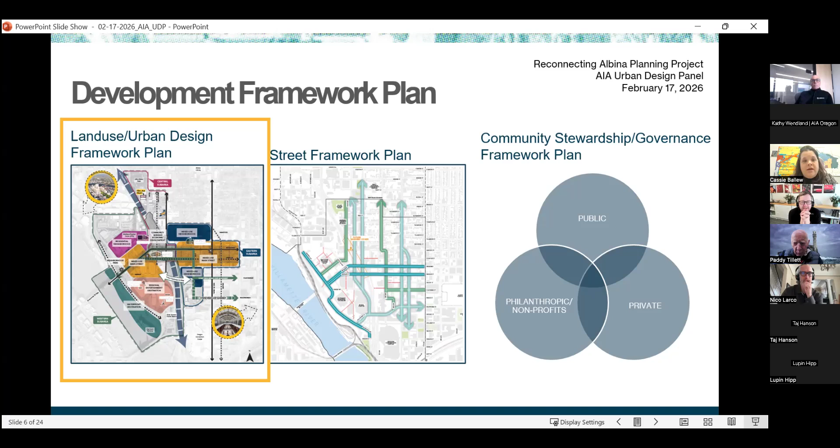So the development for this project is building on, in particular, two past plans and frameworks that happened pretty recently. The first is Central City 2035 Plan Urban Design Framework for the Lloyd District, and then the Albina Vision Trust Community Investment Plan. Both of these laid a pretty solid foundation for how an updated district framework might consider new zones of activity, new neighborhoods.

For instance, the Central City 2035 plan has kind of helped us build off the foundation of thinking about the character of different streets, such as Broadway, Weidler, Interstate, MLK, Grand, and Williams, and we wanted to take that to community and see if those ideas still held.

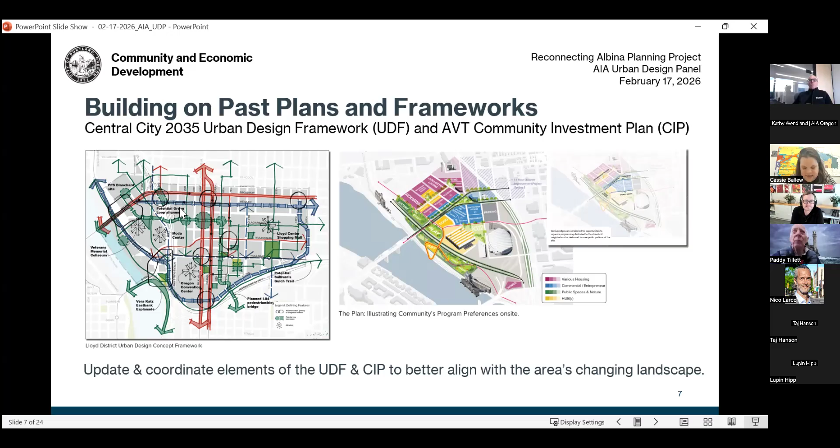With AVT's community investment plan, we have looked at how they laid out different zones of activity, functions and uses in the district, as well as several other concepts for gateways, et cetera, and trying to build off that as well. So although some of the initial details of these plans have shifted over the years, they're really creating that foundation for this. One of the goals is to update the elements of these frameworks to better align with the area's changing landscape.

So our current district framework, this image on the left, which is a little small, I have a larger one at the end to share, is to really leverage the area's strengths by creating a fully functioning and connected district, as well as support its role as a regional destination.

The framework identifies three sub-areas, Western, Central, and Eastern, and within them the shaded areas indicate different functions or zones that were influenced by the CIP, Central Cities 2035, or just our general thinking about how the future of these neighborhoods could grow.

The Western area is basically the area west of I-5. It's our most dynamic and large sub-area, a hub for major entertainment venues, offering future opportunities for waterfront development, and offering an opportunity for a new residential anchor with the redevelopment of the Matthew Prophet site.

And then the central area is really focused on that future highway cover, thinking about the community-serving uses and connectivity that it's slated to serve.

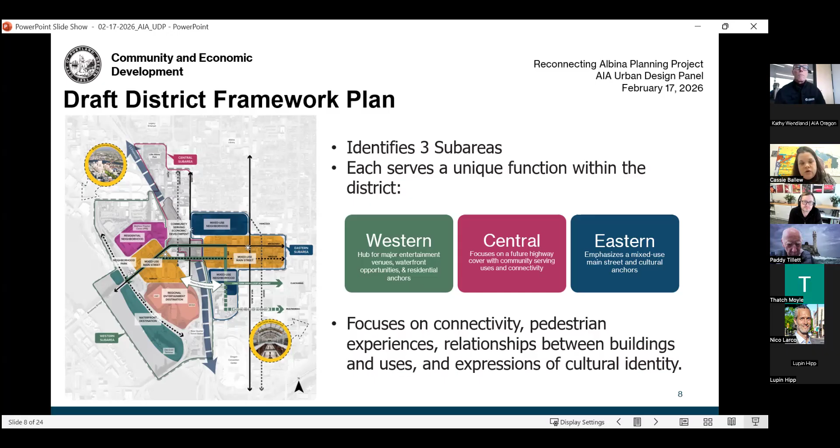The current zoning and entitlements already allow for a wide range of uses and building types. So instead, our team has focused on connectivity, pedestrian experience, relationship between buildings and uses, and expressions of cultural identity within the district, really trying to emphasize these unique sub-areas.

So on another level, the framework we're building, we've stripped away some of the elements to look more closely at street and pedestrian connectivity, thinking about identifying future existing desire lines, for instance, how to have better connections through the Rose Quarter venue sites or through the parking garages.

Also thinking about what areas could act as key gateways or open space opportunities. On the pedestrian connectivity map here, we have this red pedestrian connection line that's really influenced by Albina Vision Trust, one of their concepts for an Albina walk, and thinking about how we could expand on that and emphasize it in our framework plan and any future legislative projects.

So picking up on concepts like that and just seeing how we can use these to revitalize and strengthen the district's neighborhood and connectivity.

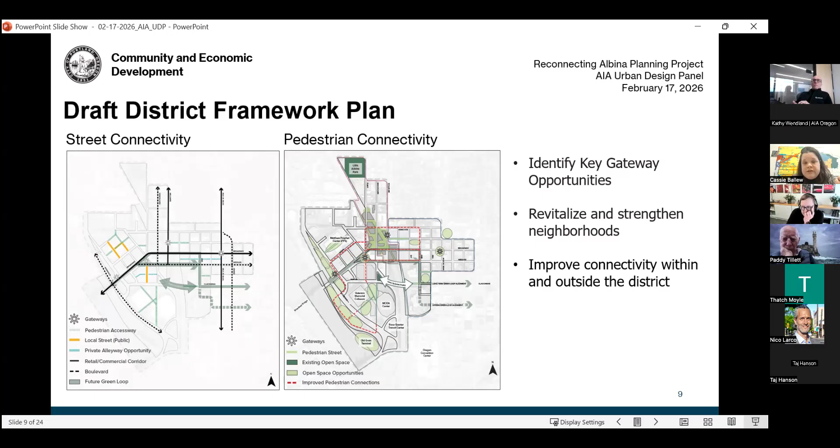So next, I want to take you through each of the sub-areas a little bit. They each, as I said, have their unique functions and character. For the eastern sub-area, we really wanted to emphasize a mixed-use Main Street on Broadway, as opposed to thinking about what the Central City 2035 plan laid out as its main function as a commercial corridor.

Whereas Weidler, we're really looking at making an improved public realm experience on Weidler and seeing that more as a boulevard, as you're kind of just passing through that, and thinking about how those two streets interact and what their character is, and seeing what community thinks their future character should be.

The images are also looking at pushing for restored opportunities for mixed-use neighborhoods, flanking that Broadway Main Street, to again uplift and strengthen the existing cultural cornerstones in the area. So really trying to make this a neighborhood with a central Main Street couplet, and also looking to make safer, more well-defined opportunities for pedestrians and cyclists.

And the notes here are our work with PBOT to try and knit some of those pieces together to make sure we're thinking about not just future activation of the corridors, but how we're connecting to the rest of the district. The photos on the right were intended to show community different ways that these corridors could be activated, showing some ideas for traditional storefront, what some of that could look like, and seeing how that resonated.

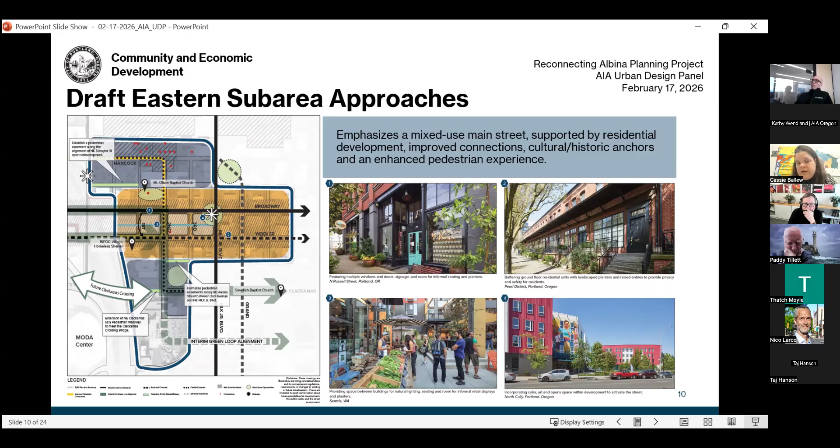For Central, it's a bit more straightforward. It's really focused on the Rose Quarter I-5 highway cover, and improved connectivity.

The image you see here on the left is based off work that AVT did with Holst and the HAB, the Historical Albina Advisory Board, back in 2024. They worked on concepts thinking about what kind of community uses, public space, and connectivity could be on the cover, thinking about the southern portion as the civic community public-board space, and as you move further north, it's more private, more community and neighborhood serving.

And so we really wanted to re-approach this with community in December, see what they still thought about it, give some more visuals, reflecting what was heard from the HAB those two years ago.

So again, showing some images of open space, active public space, amphitheater, reflecting back on the Historic Cultural Center, showing examples of that or the Black Historic Culture Center that's been proposed, and also thinking about a future market space, how we could throw in elements of Afrofuturism, trying to weave that into the narrative of this place, because a strong expression of cultural identity was really a theme in this part of the district.

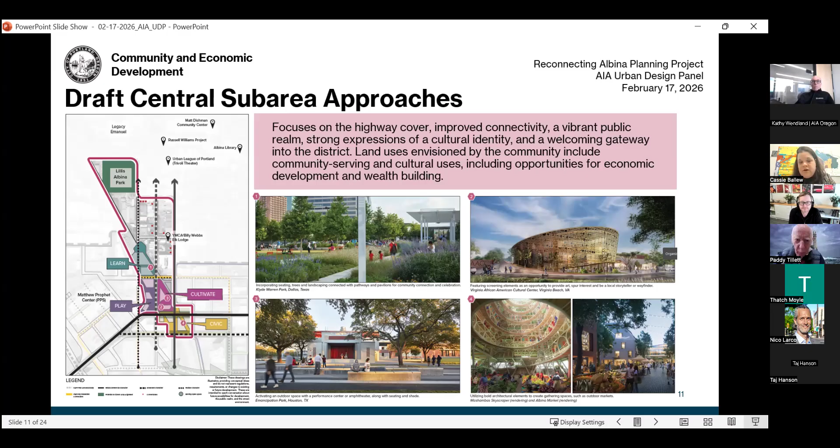Also creating a welcoming gateway that helps stitch together the east and west parts of the neighborhood.

And finally, the western sub-area is again our biggest area. It's the most dynamic, it's had the most change even over the last year. Things have been shifting. Many of you have heard about the 1803 project, the 1803 fund announcement, buying the Castle Tire facility site, and the dynamism around the Rose Quarter venue sites as well.

So the goal with this sub-area is to emphasize there's an opportunity for a restored residential community at the Matthew Prophet site, kind of anchoring this area, and then how we can use a revitalized mixed-use Main Street on Broadway to connect that neighborhood and support the rest of the sub-area.

Thinking about expanding and supporting the existing active entertainment district, creating a well-defined open space network for pedestrians and cyclists, trying to improve access to and activation of the waterfront, and since the western sub-area is home to some of the most dynamic sites and property owners, we've chosen to look at three specific sites to engage community and envision how future development could create a better connected and engaging public realm experience.

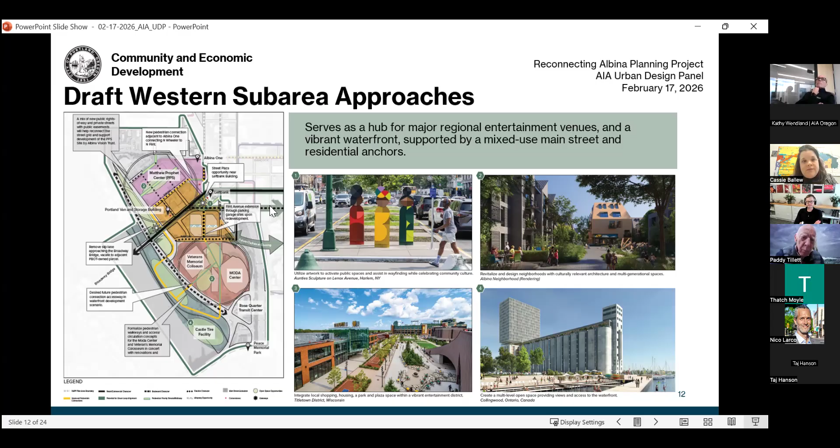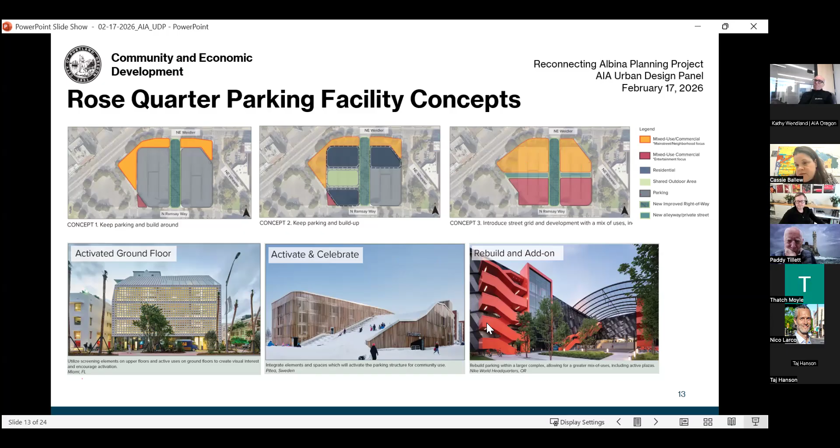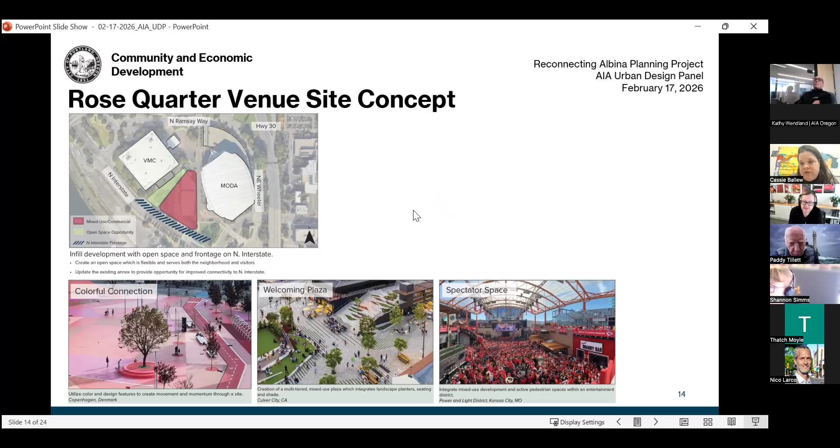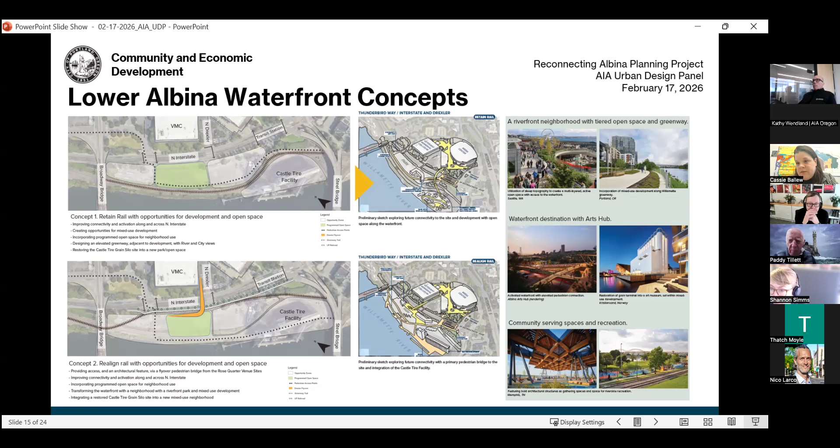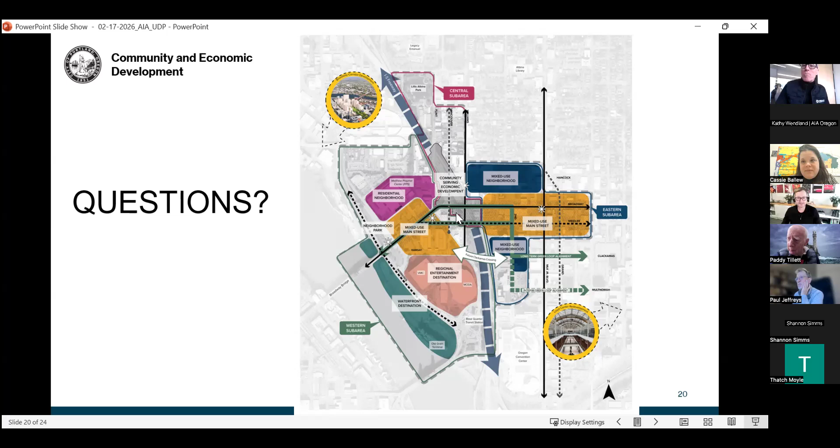First and foremost is, what if the Blazers relocate and that activity is no longer there? Are there considerations or ways to think about that in the plan?

I'll take that one, this is Troy Doss. We're desperately hoping that doesn't happen and will do anything we can to make sure it doesn't. But if it does, the Blazers are only one user of the facility. WNBA is going to be there, and there's other events that go on there. They're trying to program it for more opportunities. It would open up the conversation of whether you really need performance venues there if the Blazers weren't there. I will note that we have increased the entitlements in the area as part of the Central City Code Amendment project, so there are possibilities for redevelopment opportunities there, but that's plan Z at the moment. We're not banking on it - we're hoping that never has to be an issue.

Thanks for that. I'll continue Don's question. So I'm assuming if high-speed rail were to come through there, is there provision for having basically a grand central station there for high-speed rail, if that became a commuter or transportation service that really was active there? These are just ideas - and also a pedestrian bridge over the Willamette.